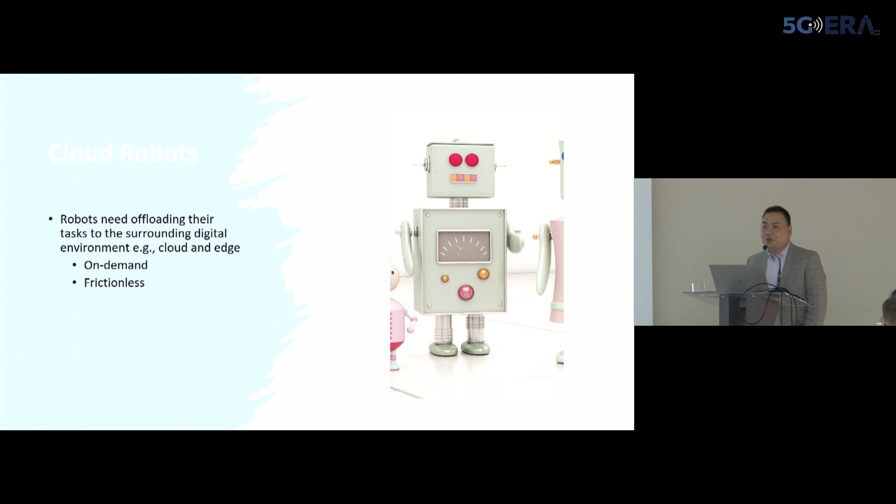So in that sense, we want to offload some of the tasks running in the robot to be running in the cloud, to be running in the edge, and eventually we hope we can deliver better robots to serve people and to serve the community.

But I would say that this is still on paper, because you can see a lot of effort in translating the daily activity into robotic service, into cloud robotics. However, we face quite a few issues in actually accepting the application by the industry, although there is lots of effort like Amazon providing the cloud robot service like RoboMaker.

But the majority of things we face in robot application, especially related to networking, is that the applications are normally designed for structured and industrial environments. In this sense, you have fixed quality of service, the network topology is generally static, and you're working in a single domain, single administration environment. Unfortunately, this is not the case we have with our internet, and we normally face different kinds of challenges in terms of unstructured network, topology, different administration, etc.

As a result, a lot of appealing applications for robotics are not actually translated into services in the community.

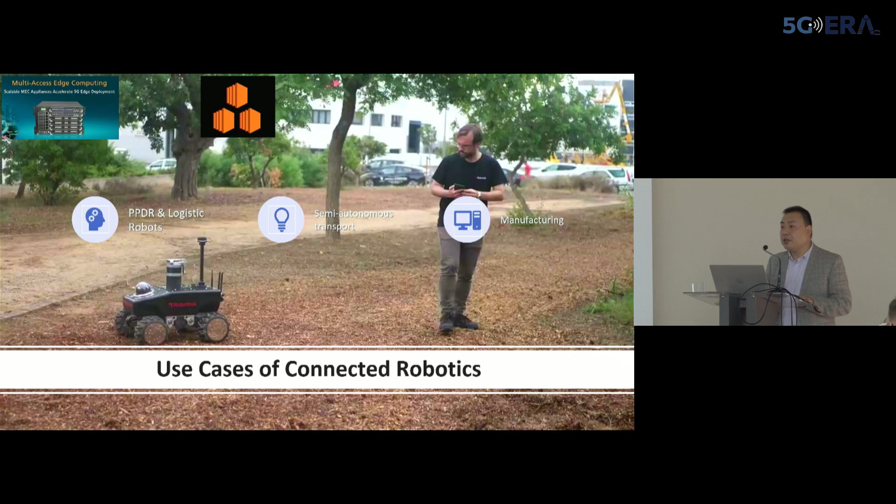We will show you a few use cases first. My colleague will talk about the PPDR and logistic robots, semi-autonomous robots, and manufacturing applications. Using these use cases, we will show the benefit of the connected robots. We take advantage of cloud resources, we take advantage of edge computing, but more importantly, we take advantage of the whole network behind us to deliver better robotic service.

So that's the agenda for today, and you can see that we will start with the use cases, 3 of them used by the project, and after that we'll talk about what is behind those use cases. Lots of people talk about use cases for 5G, for 6G, and in our sense we're trying to fully implement the network softwareization for the robotics. We will explain how we achieve them by the technical issues we're explaining.

And in the afternoon we will have 4 booth sessions in this room showing our use cases and reference design. And finally we will have our seminar and tutorials together with the booth sessions explaining our fleet management ideas, and a tutorial on how to add security and identity management, how to use the relay network.

We mentioned that we want to do the full softwareization for the robot application. So this is behind the implementation. They are available on GitHub. We'll do the tutorial with you.

And then finally, we have our live demo of a simulated PPDR robot in the car park of OTE Academy.

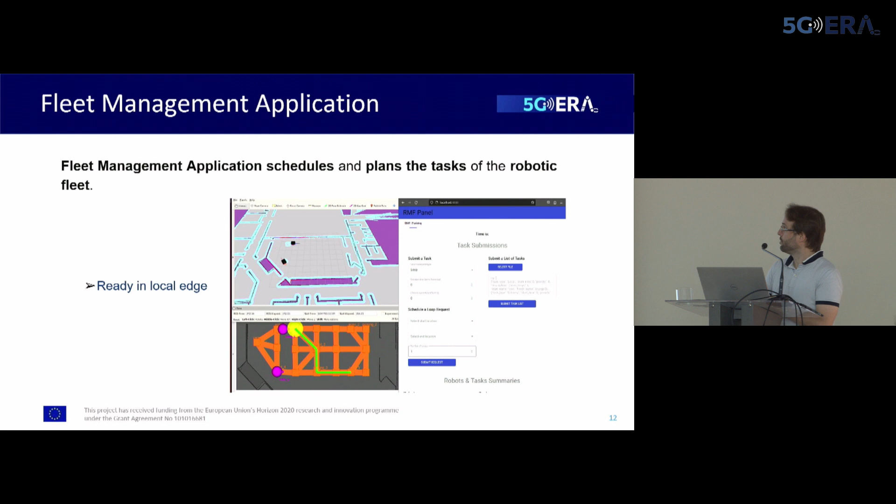So we have frontier exploration. This is like a joint application - when you have an unknown environment, you will need to make a map for the robot to locate itself, and also you have the 3D map.

Also, you will need some kind of 5G signal quality mapping, because if you want to do things like offloading or human recognition, you need to know where it's forbidden to go or if it's a bad choice. We also combine it with remote operation, because with something more industrial-like it's easier to make an algorithm that sweeps the area, but with unstructured environments, we need something that relies on a human in order to have a good map of that.

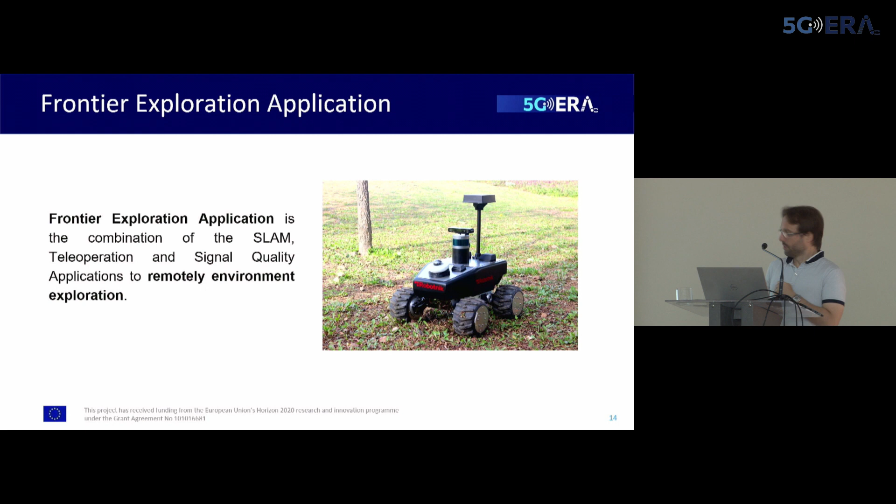So let's move to human presence. This is an application for detecting people. We're thinking that in case of disaster, you use AI recognition, but this kind of robot has heavy load that can stress the computer inside. The idea is to detect a human, like these examples, and save the location of the robot at that time, so afterwards rescuers can be sent there. So when the robot is doing the map or sweeping to search an area, it automatically detects people and sends this location to the rescuers.

The signal quality application is about making a map of the signal quality of the 5G network. I think this is very interesting for the network community, because when you're deploying antennas in this kind of environment, you need to know if you have black spots or areas without good signal. With this, we make a semantic map, a color map that indicates how well the signal arrives to the robot.

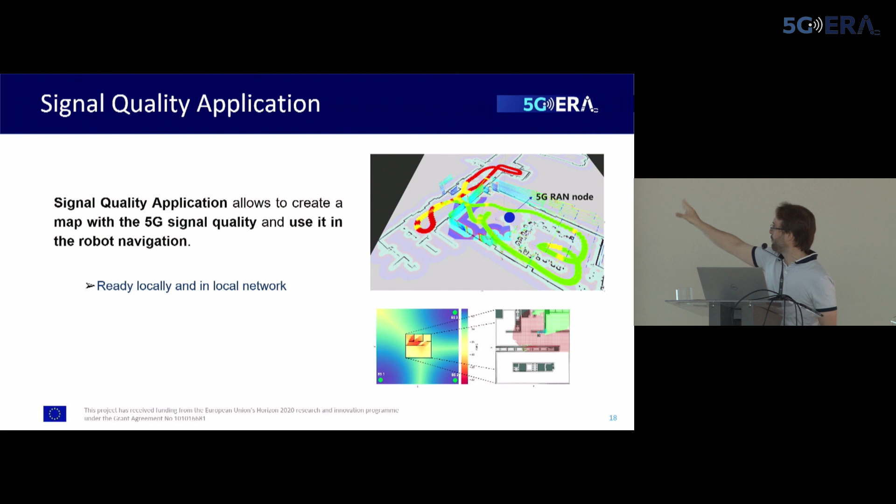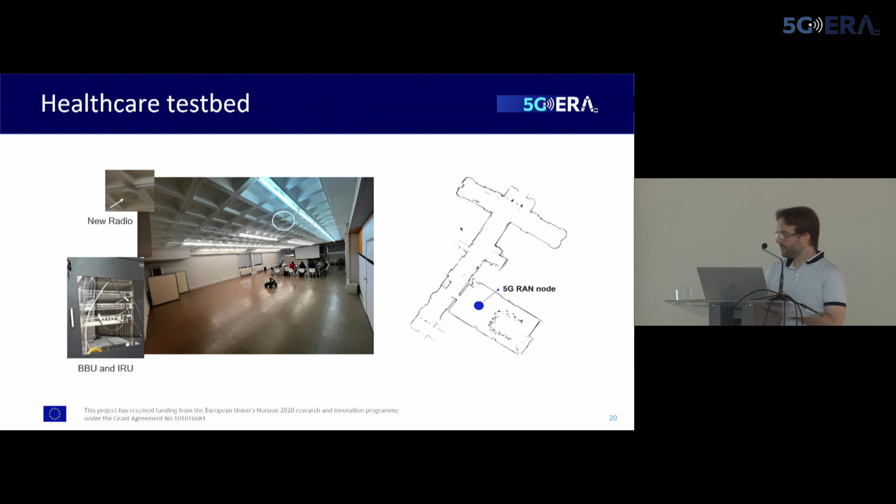So let's see what we have done in the last few months. We were here. Thank you to OTE for having us, and we could make this map with the signal quality, and also test the surveillance outside with the human presence application, and we have the PPDR.

So we have some kind of video that I hope works. Well, my Greek is not... I think this goes here. Okay. So this is a video with the surveillance case.

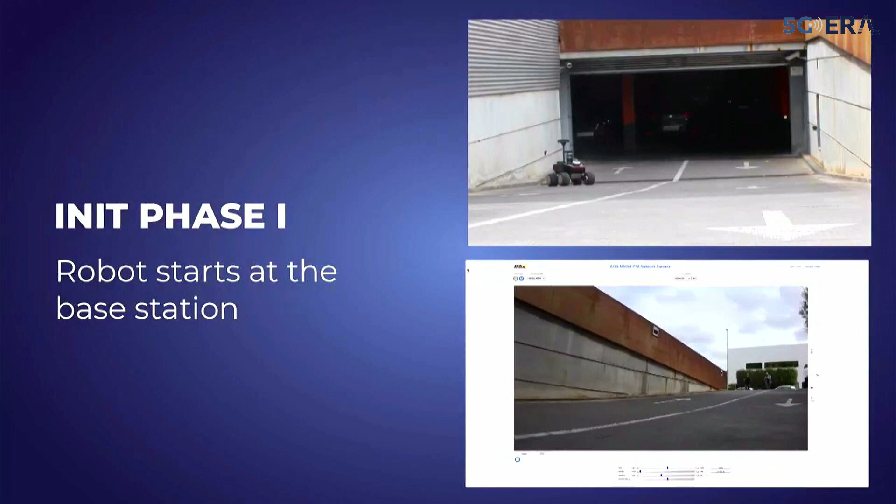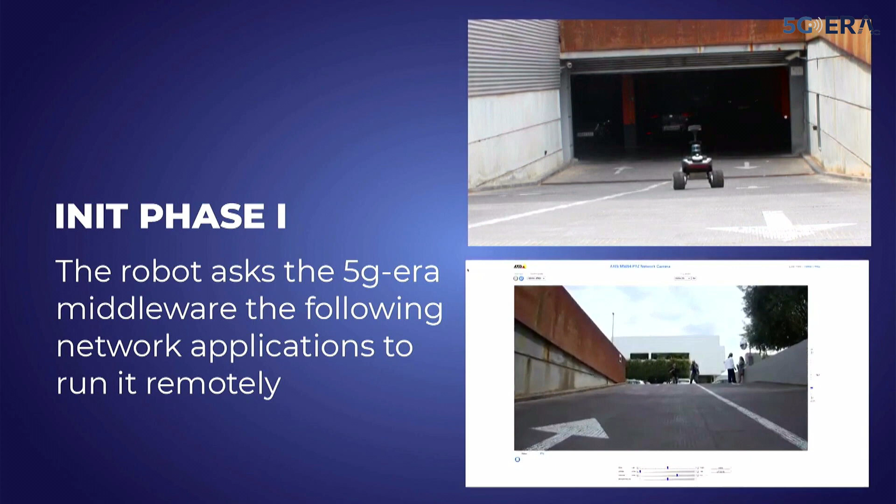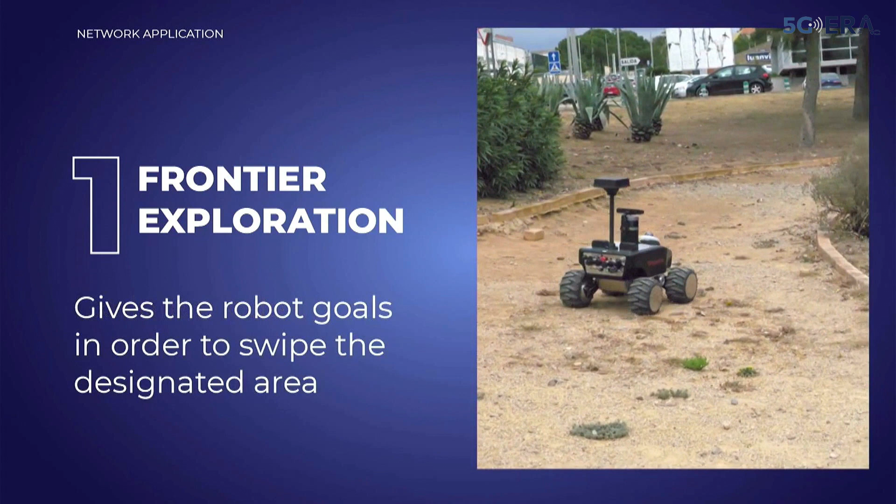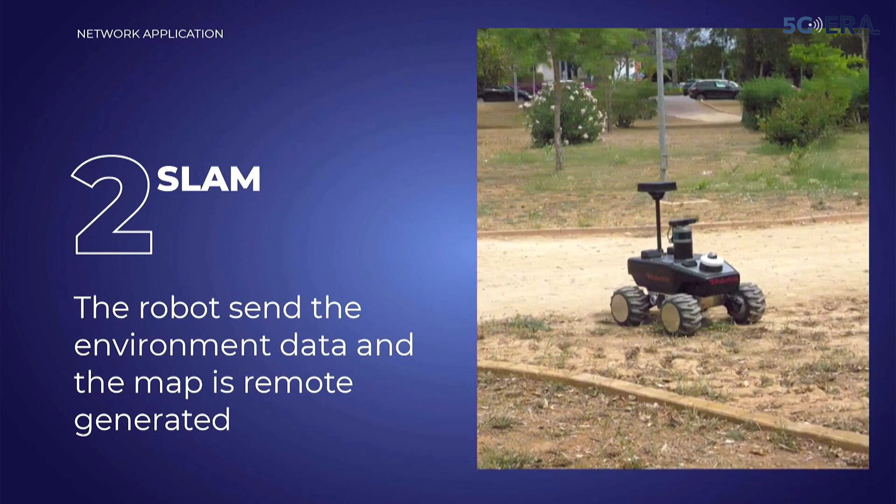So more or less, this is the workflow. First it sweeps the area using exploration mode, the frontier exploration, and you can see this is a robot for outdoors, so we should expect changes. It will sweep this, for example, an unstructured area. Now it's moving, making the map. And the map is not generated inside the robot, it's outside. Also, it's searching for people.

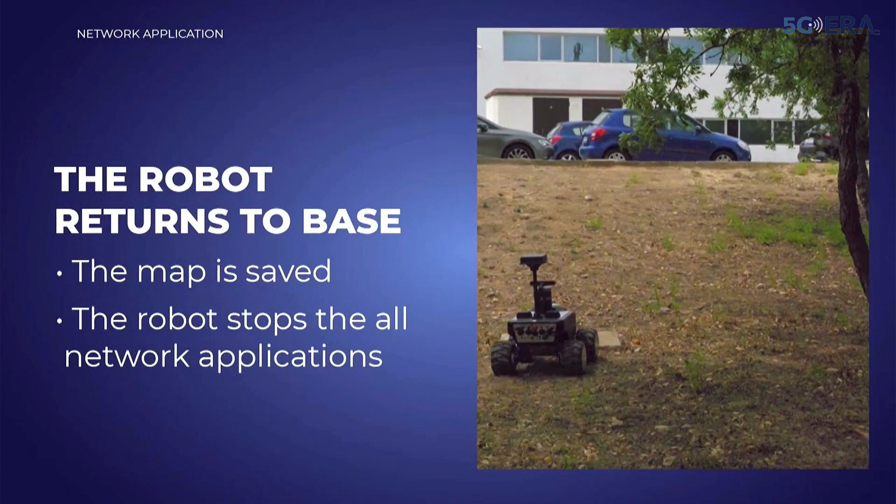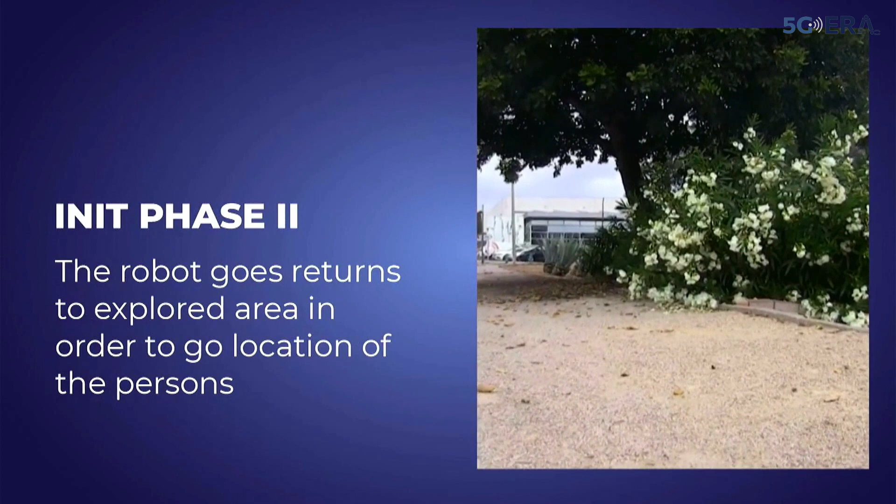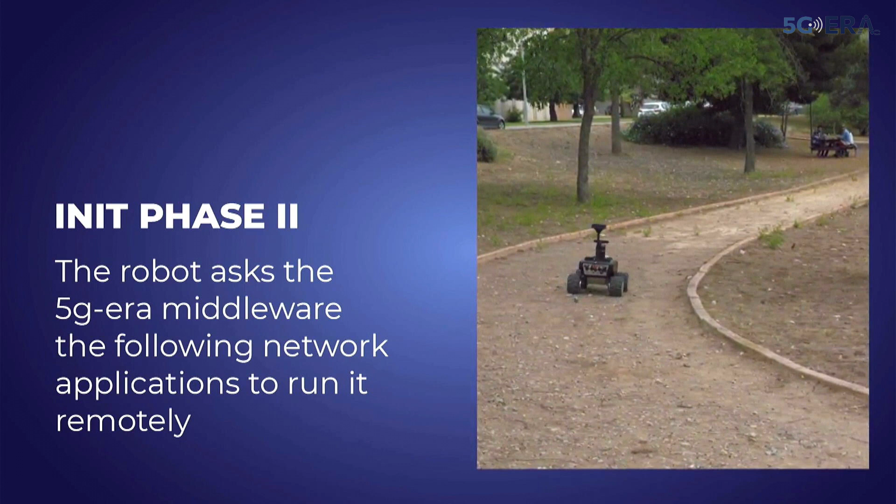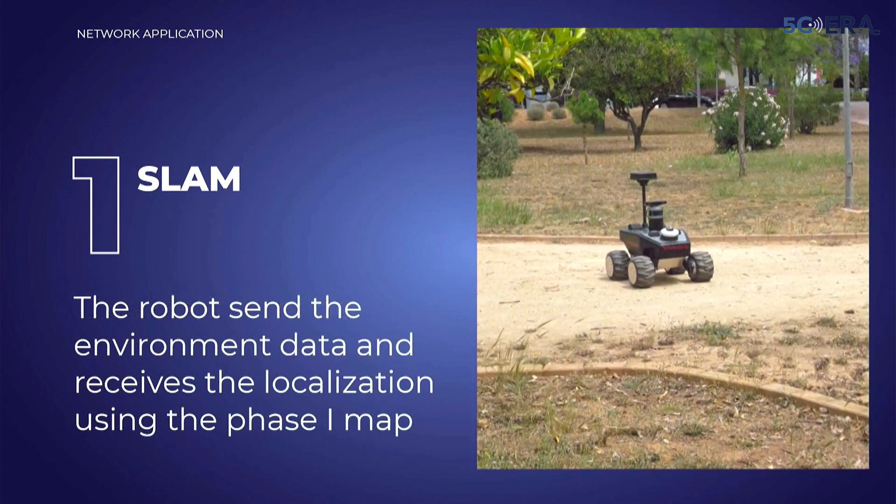Now the robot returns to the base. It has made a map of the area, and now it can move more precisely to certain areas. So now it has the map, and it can start the second phase. Once we have the map, the robot goes to the last known location in order to check, and a remote operator can give control so it can come closer to the robot, to the person, and also localize itself with the map, with the previously generated mapping. This map could also be shared among other robots if we have more.

So this is a great advantage to have it on the edge, on the cloud. Now it's returning to the last known presence, and it provides the ability for the robot to navigate autonomously to the human point. And now it's giving remote control to the operator.

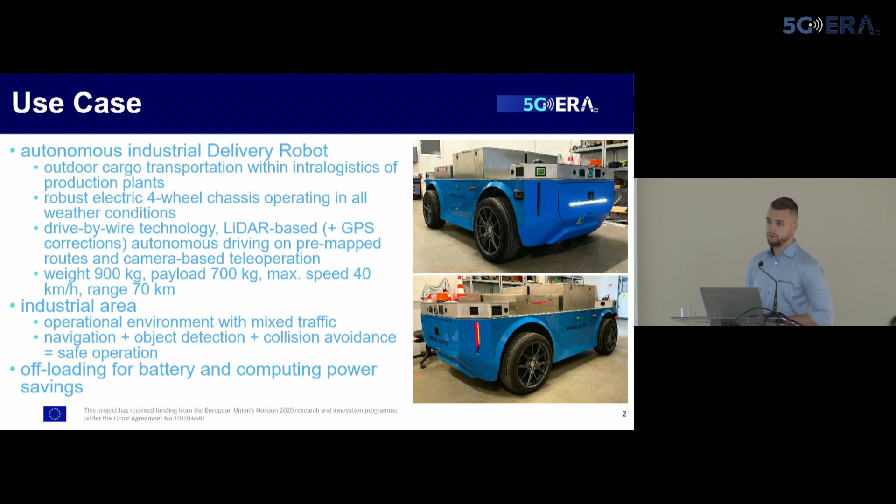This is how the robot looks like, and we can move on to the outcomes we are trying to reach within 5G-ERA. The two main ones are two network applications, which I will talk about in a while. The first one is train sensor, and the second one is collision avoidance.

Regarding other hardware and software which we use within 5G-ERA, there are three automotive-grade cameras used for these tasks and network applications, with 120 degrees field of view. Then there are clients running on Jetsons, which communicate via public 5G networks using the router RUTX50, and communication with the 5G-ERA middleware, which is deployed in the cloud, as well as the network applications, which are deployed in the cloud.

But the network applications are also deployed locally. That's because when there is an area where the network performance is pretty poor, we need to seamlessly transfer from cloud processing to local processing to enhance network performance in that case. But the main outcome is that we are able to offload to the cloud, so the local processing is used just as a backup if the network is poor.

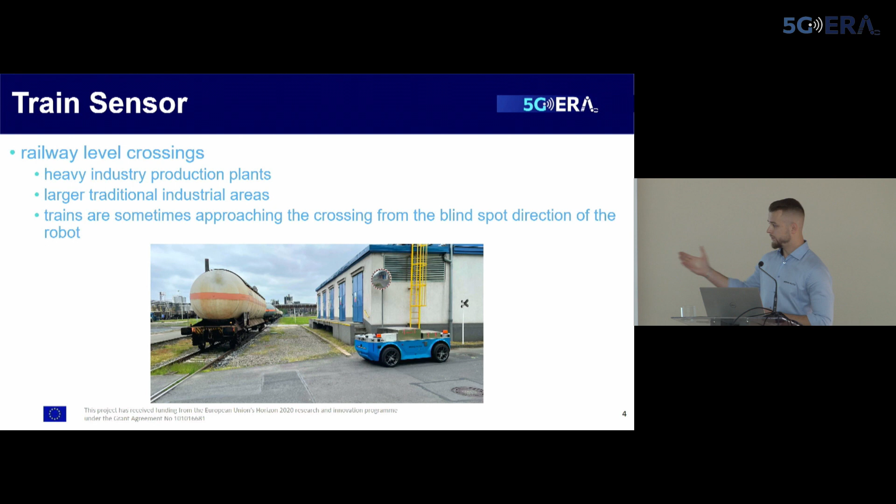In most places, the trains are crossing the road in various directions. And the challenge here is that sometimes they approach the crossing from the blind spot direction of the robot. So that's why we need to detect them, and make sure the robot is safe to cross without colliding with the train. This is just an example of how it can look.

The workflow of this network application is pretty straightforward. We use two cameras, the front right and front left on the other side of the robot, for this network application. The robot comes to the railway crossing, stops in front of it, and triggers the detection of trains, detecting them for as much time as needed to be 100% sure that the crossing is safe to pass.

The results we obtain after processing within the network application are four main ones: no train detected at all, or trains detected but not moving, in which case it's safe; trains detected and moving in either direction; and the fourth case, which is sometimes an issue, where the YOLO5 detector is not able to determine whether it is a train or whether it's moving.

In case the trains are not detected, or they are detected but not moving for, say, 7 seconds, we can set this value. Then it is a signal for the robot, for the autonomy system, that the crossing is safe to cross and pass.

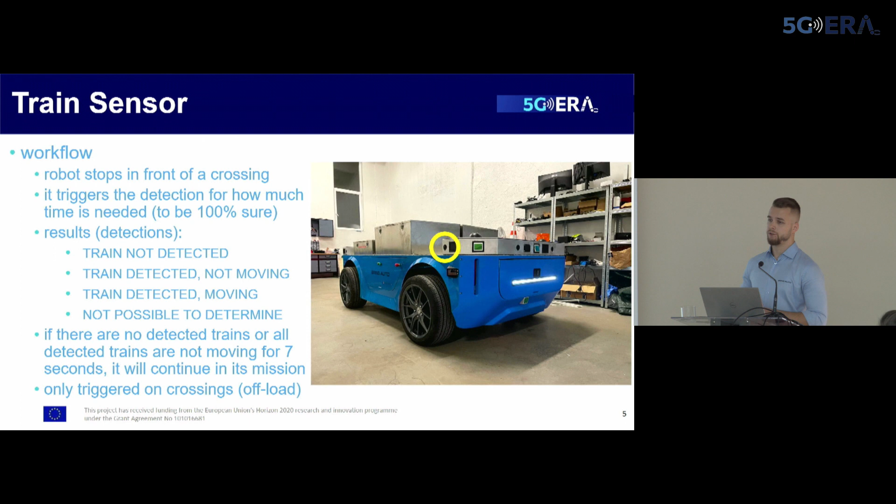This is how the train sensor works. The important thing here is that the train sensor network application is not running all the time. It is rather triggered only at railway crossings, which means we are able to offload even more and save power.

Now this is a video of how it looks. You can see my colleague Aladdin riding the robot. The robot is moving autonomously on a pre-mapped route. Now it comes to the railway crossing, so it stops in front of the crossing and triggers the detection. Down there will be the views of the left camera and right camera.

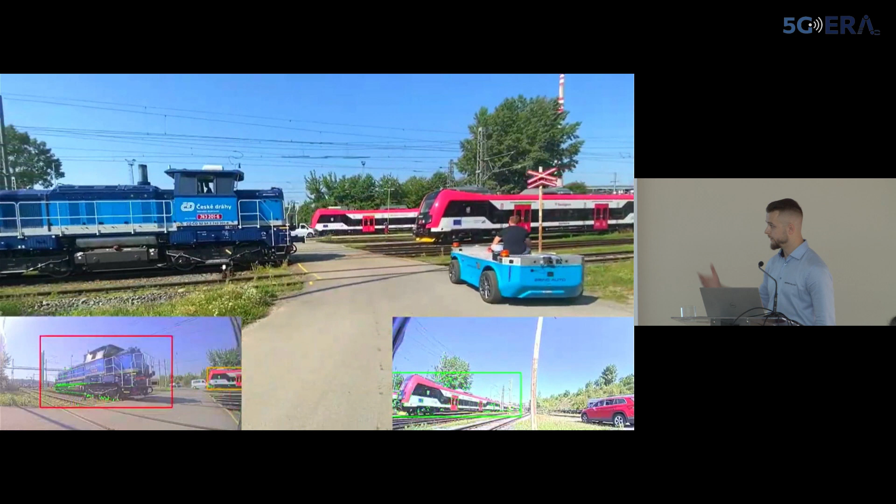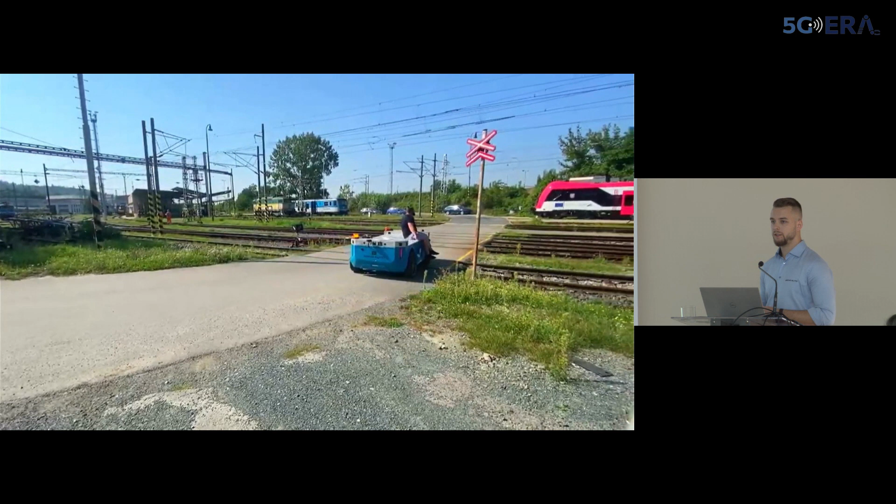Now the train is on the left, behind. It slowly brakes and stops moving. The robot detects all trains as not moving, and this is the signal that the robot is capable of crossing that crossing safely. Now it continues its mission, its task, and safely crosses the crossing.

So this is how the train sensor network application works, and why it is important for us to sense and detect all the trains.

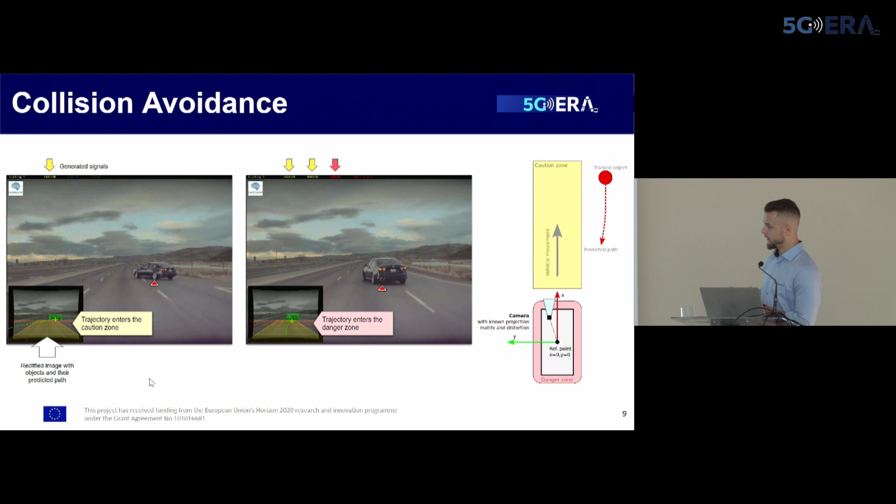So this is just the brief idea behind these network applications. The visualization or UI looks like this: in the top part there are the generated signals — caution, warning, danger. In the bottom left corner is the visualization of the robot space with the caution zone in front of it, and the detected objects marked with a red arrow and a green square. So this is how it looks in principle.

Why is this so important for us? Of course, whatever the robot, whatever the area or environment, and whatever the use case, when driving autonomously at certain speeds, collision detection, obstacle detection, and collision avoidance are two systems essential for safe autonomous operation. Each autonomous robot should have these two systems to navigate the area and avoid collisions. So this is why we need to detect objects and avoid collisions, and the workflow is a little different in this case.

The collision avoidance network application runs the whole time, so it's real-time object detection and tracking, unlike the train sensor which is triggered. The collision avoidance runs the whole time during robot operation. As long as no object is detected, or detected objects are not about to enter the caution zone, the robot drives at full speed, let's say 20 kilometers per hour.

If an object is about to enter the caution zone, a caution signal is generated, meaning the robot will slow down to half of its full speed, so 10 kilometers per hour in this case. If a warning signal is generated, it means the object is already in the caution zone, and the robot starts to brake and stop.

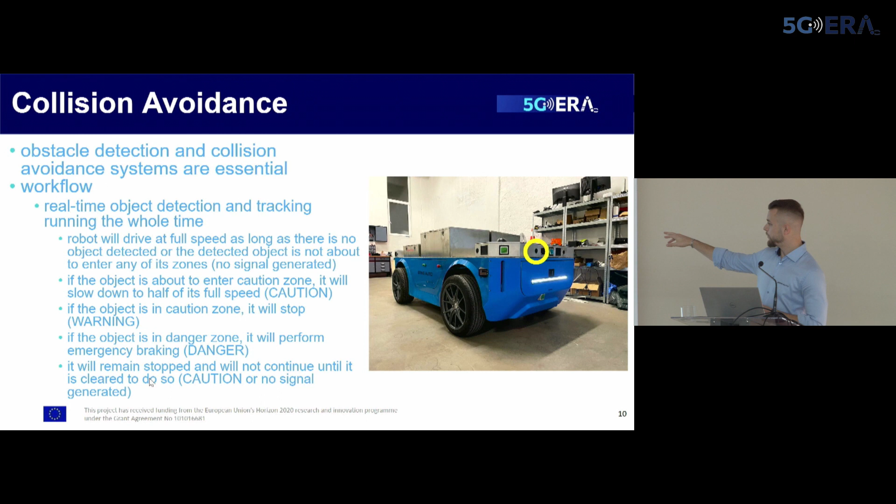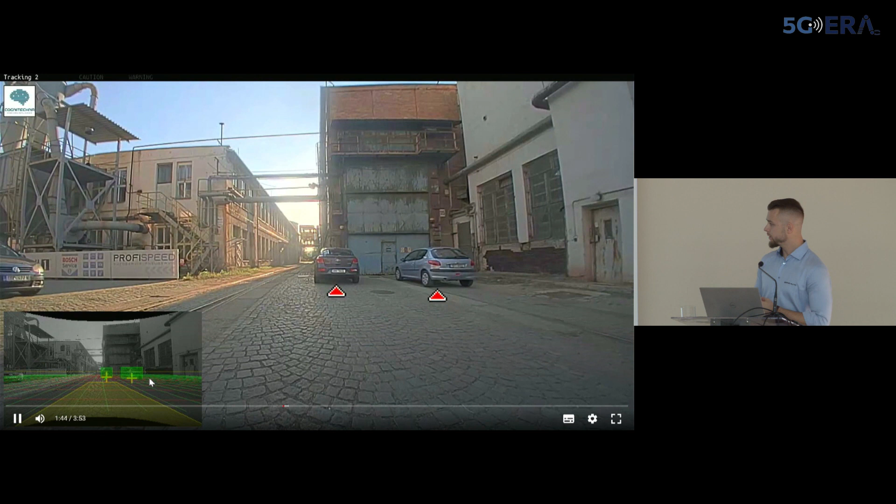For this purpose, we use the front camera of the robot. This is a video of how the collision avoidance network application works. You can see cars detected from the image, and now it slows down because the car was in the caution zone. It turns down there. You can see the detected objects and the caution zone of the robot.

It detects the cars, but there is also one of my colleagues. The robot detects him. First it slows down to half its speed because the caution signal was generated. Then, as my colleague stood right in front of the robot, the warning signal was generated, and the robot stopped in that case. So this is just a brief showcase of how it works.

In the afternoon session, at the booth, we'll have a live demo of how the collision avoidance works. It will be done remotely, so the robot is currently in Brno, in the Czech Republic, but I will be able to show live how the collision avoidance works. That's all from my side, from our use case. I'm happy to answer questions afterwards or at the booth session. Thank you very much.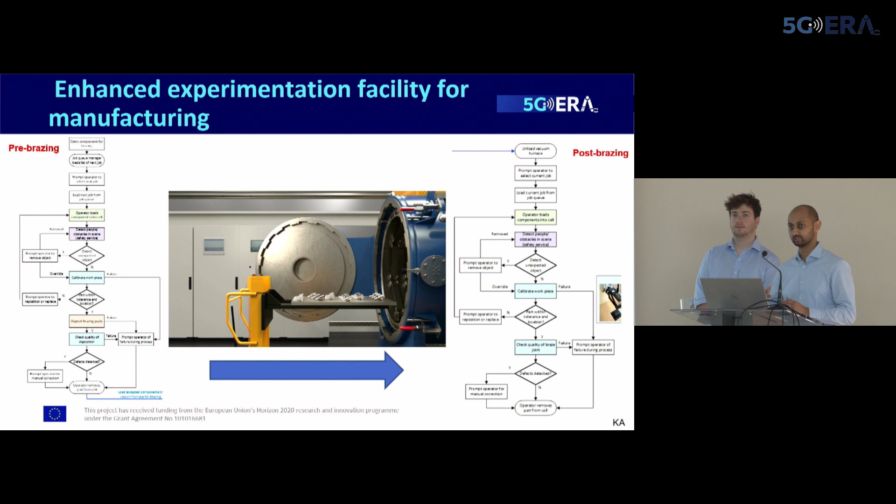So what we have is 3 steps in this kind of manufacturing process. We've got the pre-process steps, which essentially requires loading of parts into our robotic cell, where the operator engages with the robot through either mixed reality or virtual reality to execute robotic movements. The robot then assists the operator by conducting defect detection through a laser scanner, but also being able to dispense paste, which is essential for the process.

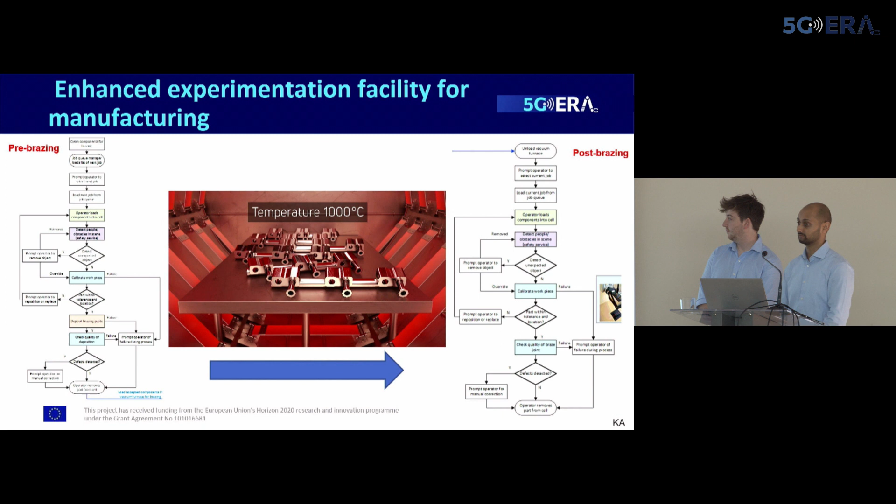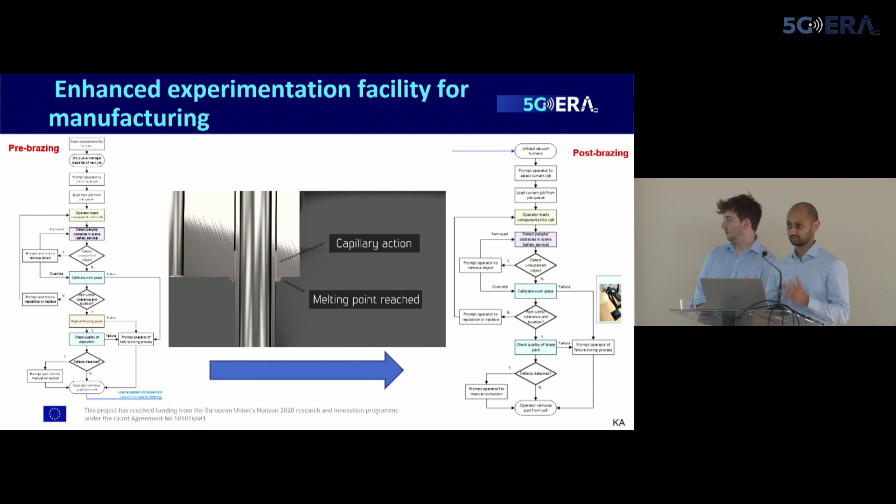So once that's all done, it's loaded into the furnace like you're seeing in the middle. Inside the furnace, the temperature is increased up to as high as 1,000 degrees, where the paste is melted, and then the temperature reduces where it solidifies and creates a component. Once this whole process is complete, the parts are removed from the furnace and then goes back into the post-processing step, which is on the right-hand side.

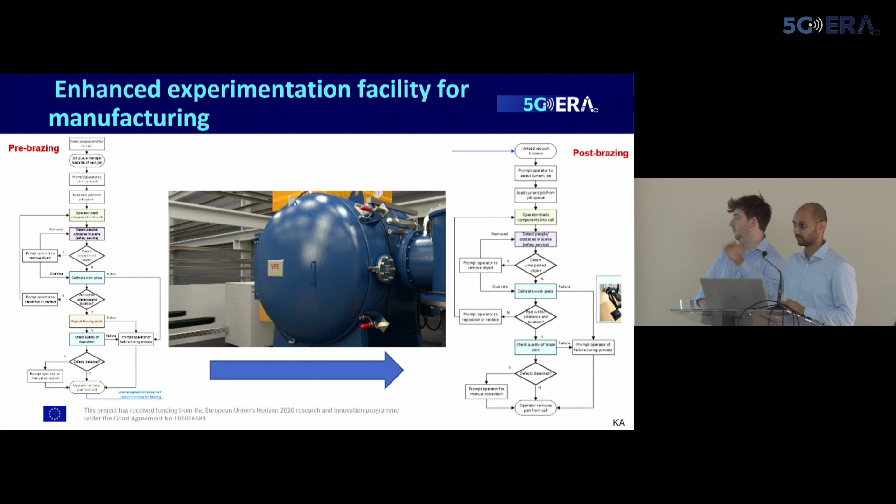And here what happens is the robot then assesses the part that's been manufactured and assesses it for defects and reports back to the operator. And then the cycle continues with the next part.

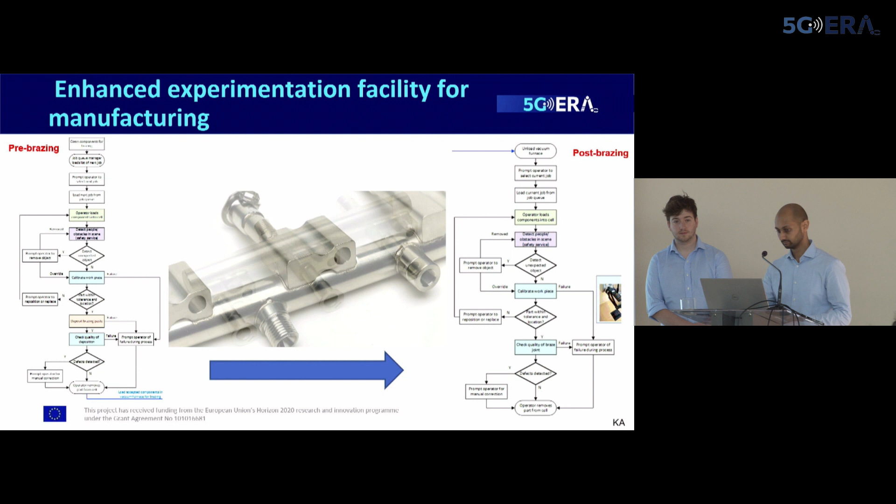Yeah, so as Kandap's just been describing, this is obviously a very high expertise procedure to run. It's a process that requires a huge amount of training to be able to do properly as a human operator. So for us, it was critical to, at a very early stage of the project, break down all the stages that the cell was going to have to be able to deliver.

So a big exercise for us at the beginning was building this flow chart, this roadmap of what, at every stage, the robot was going to have to take action on a part, every stage in which the operator was going to have to interact, whether that was through VR or a mixed reality headset. And that allowed us to break down the entire process into a set of microservices, which each is responsible for one part of this process.

For example, we have a microservice that's entirely dedicated to handling jobs as they come in. So everything about the robot's operation, the part that it's operating on, is all handled by a single operation. Everything that interacts with obstacle detection and human presence detection, the robot's capable of autonomously calibrating itself, and then running each individual part of the actual brazing operation is each handled independently.

What that allows us to do, especially with the power of the 5G Era middleware, is to deploy some of these applications where they need to be at the edge, adjacent to the robot itself, or to the laser scan profiler, or the mixed reality headset. Those translation layers, those applications, all need to be at the edge in order to interact directly with the hardware.

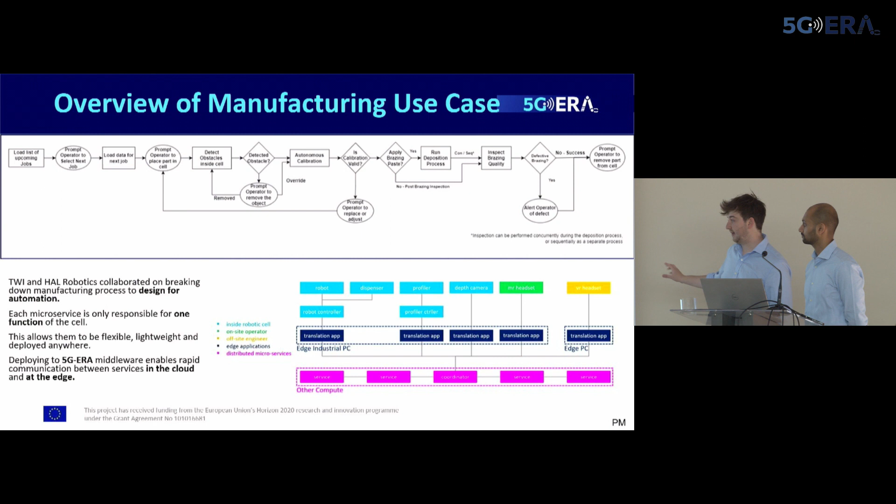But also, similar to what Guillaume had said before about their deployment, we can offload a lot of our more intense elements, such as toolpath generation and the robot digital twin, to the cloud or to on-premises servers that are not in the cell.

So I guess just to summarize what we're doing in this case is we're looking at a semi-autonomous manufacturing process, and as Paul discussed some of the difficulties, in our particular manufacturing environment, we've got a lot of security protocols in place, and also the necessity for high quality assurance of parts. This creates a lot of problems and difficulties with the deployment of network-based services.

However, through 5G Era and this project, and with the support of Paul and HAL Robotics, what we have been able to do is, with the combination of the network-based microservices and the orchestration of the hardware we have deployed at our facility on site, we've been able to execute a potentially autonomous manufacturing process.

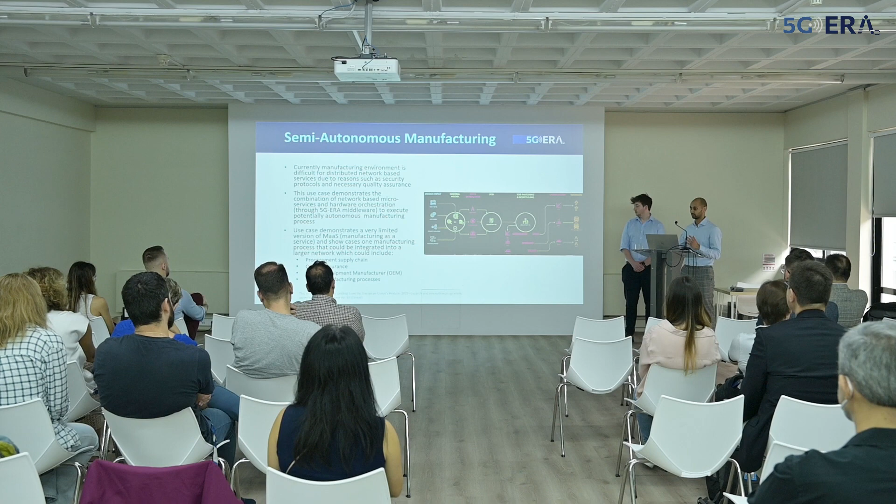And I guess one of the things about this particular use case is that it's a very small scale demonstration of MaaS, which is manufacturing as a service. And the idea we're trying to show is that this is a very small scale cell which could be replicated and also integrated into a much larger manufacturing as a service network, which could include spokes such as the procurement supply chain, proper quality control, the original equipment manufacturers such as Rolls-Royce, Airbus, and also other processes required in the manufacturing stage, which could be upstream or downstream of our particular cell.

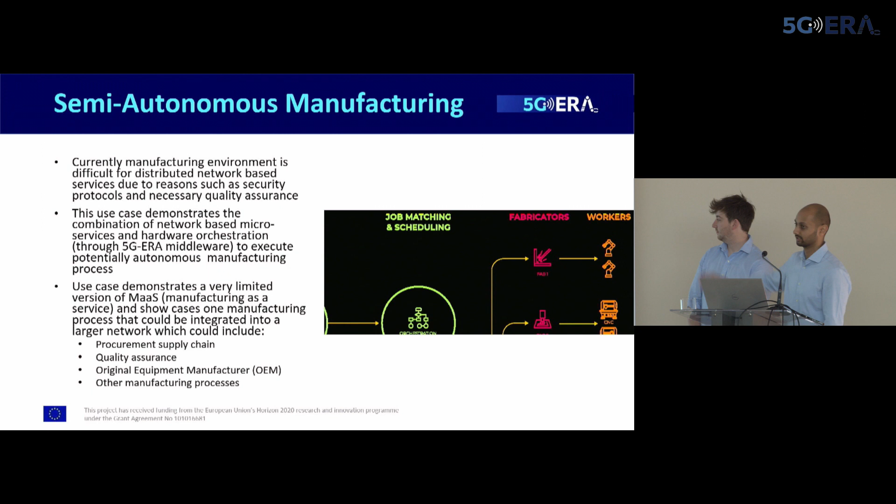So this diagram is showing you what a manufacturing network could look like on a MaaS system. And I guess what I've tried to do is just show you that we are just one potential fabricator or worker within this, to demonstrate how that could be used and deployed.

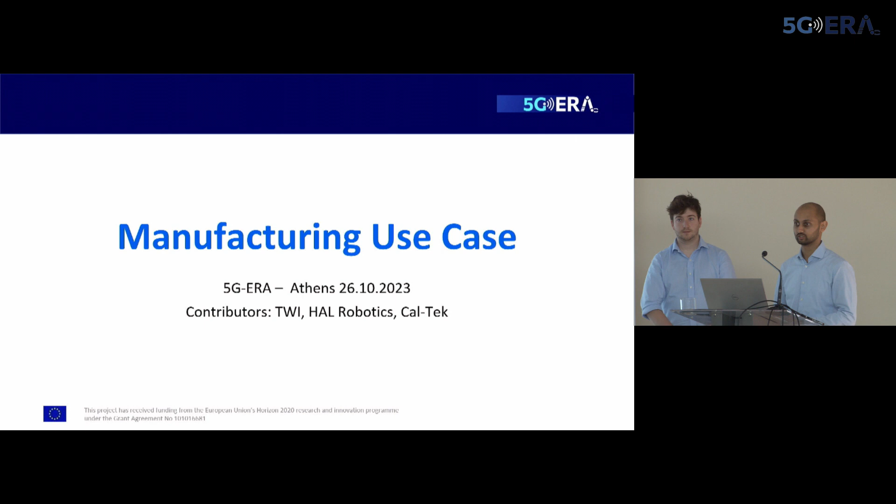So now I'll give you a quick update on what we've been doing in terms of our demonstration within our facility in Cambridge.

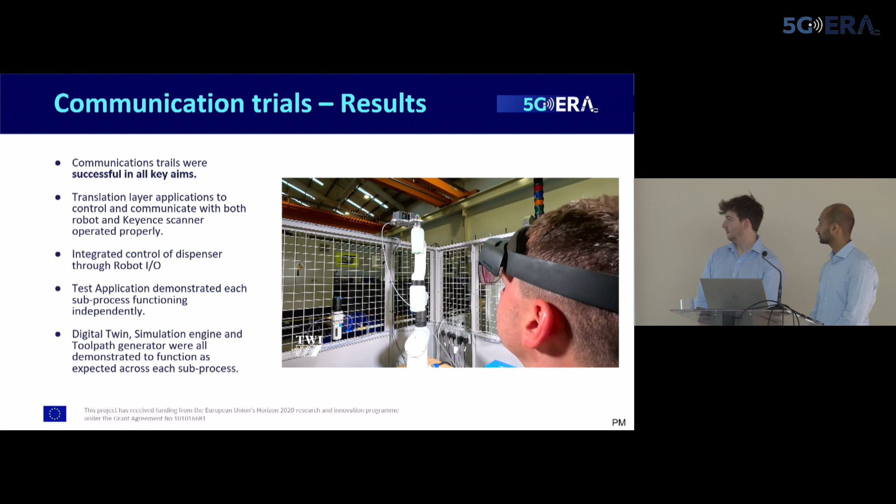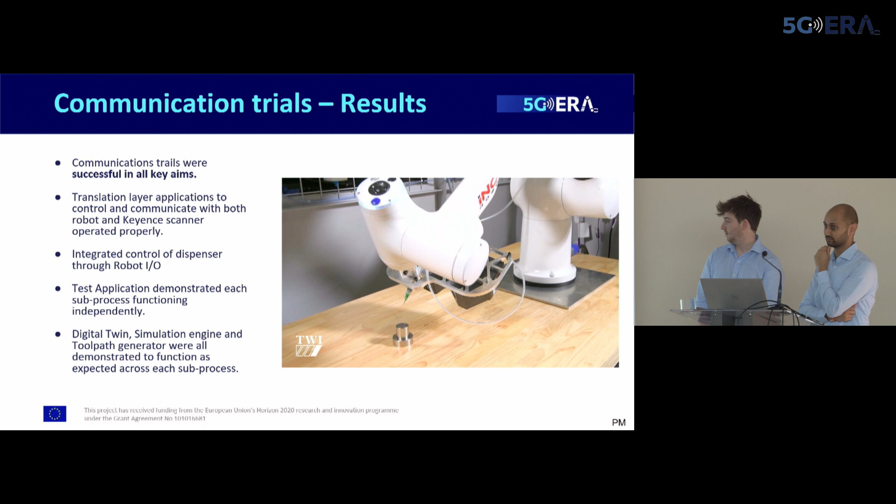So what we're trying to do here is some communication trials where we're running local tests, essentially making sure all the microservices we've developed are engaging. So what we have here is the robot toolpath and the dispensing of the paste. Currently we're working on the laser scanner, so we should have that online very soon, and we'll be running trials with our virtual and mixed reality headsets as well.

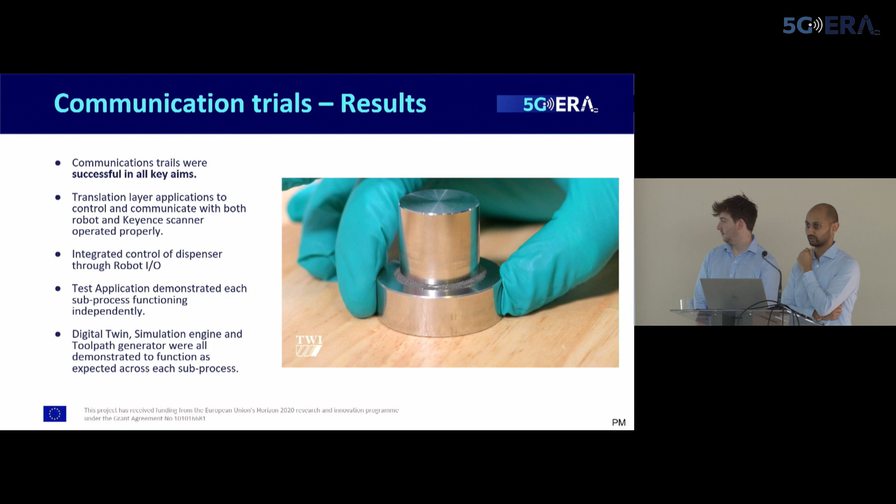From an operator perspective, Alex's entire engagement is just, in his mixed reality view, as this video will show, he's seeing a list of all the jobs coming in, and he just selects a job based on the part ID or job ID. He's not programming anything about the robot or designing the toolpath while standing there, he's just selecting a job, hitting go, and the robot extracts all the information it has about the part.

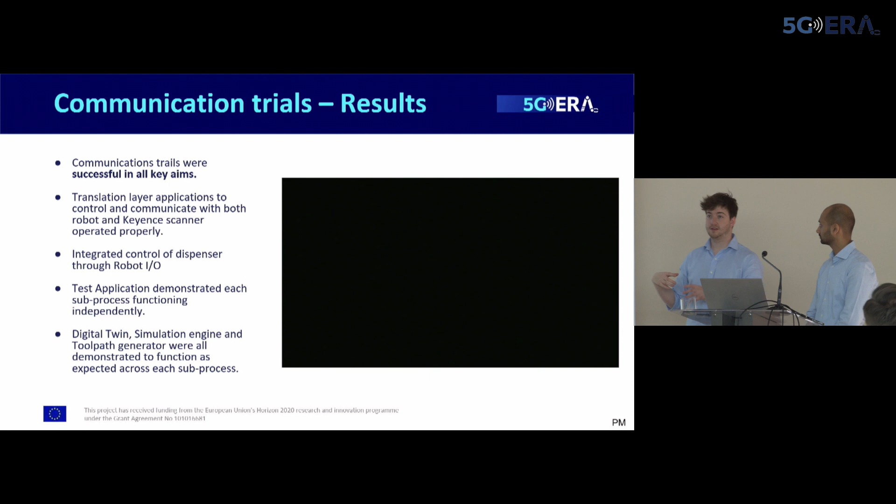So when we see the robot come in and start applying the brazing paste, all the settings about the pressure of the paste, the geometry of the part, and the speeds it has to move at, are all generated based on information contained within that job. So it separates the concerns of an expert-level design phase as a task from the operator just running it. You could have multiple operators in distributed cells and one expert building these jobs for them.

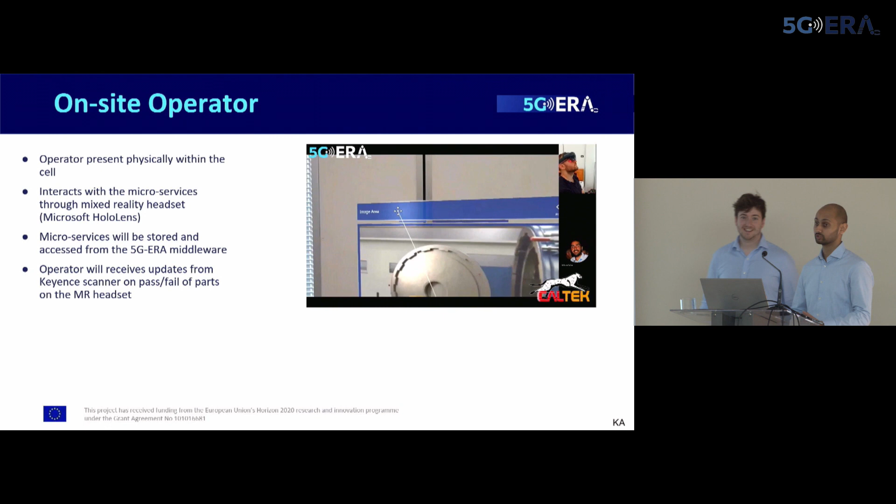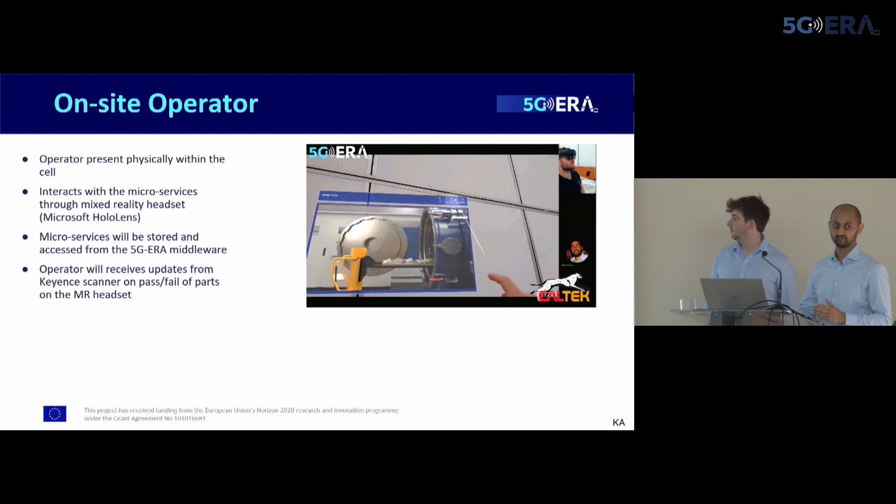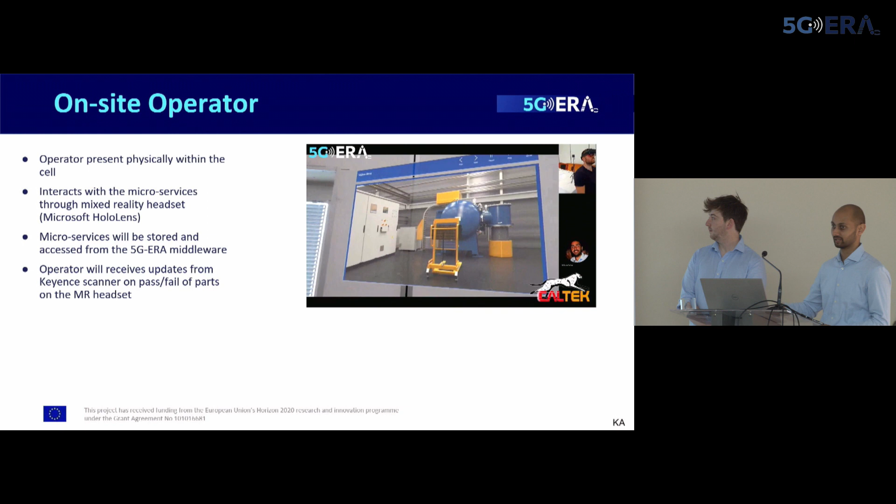As Paul described, we have two types of operators we're trying to demonstrate. First is an on-site operator, someone physically present within the cell with a mixed reality headset, able to interact with the robot cell through the microservices deployed on our 5G-ERA middleware. This allows the operator to engage with the robot through the logic flow diagram I showed earlier, confirming and accepting the trajectory, the dispensing, and receiving data from the laser scanner on whether the part has passed or failed.

And this video is showing the type of visual that the operator will see whilst in this environment.

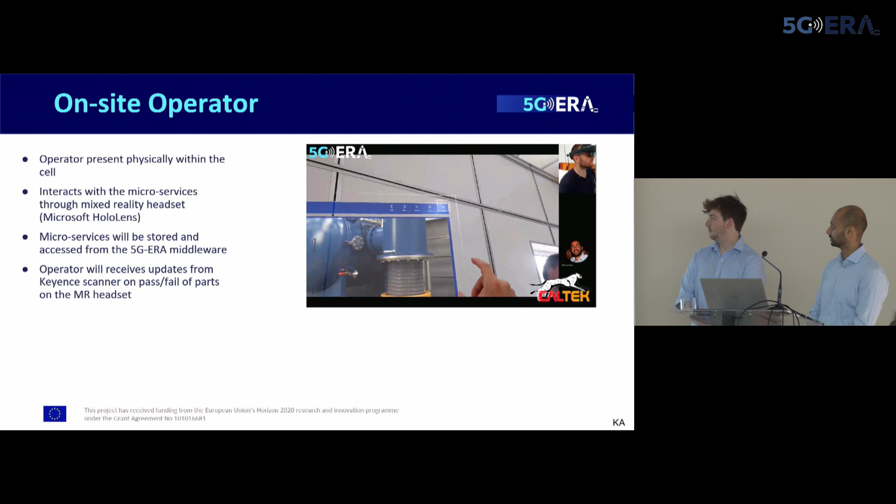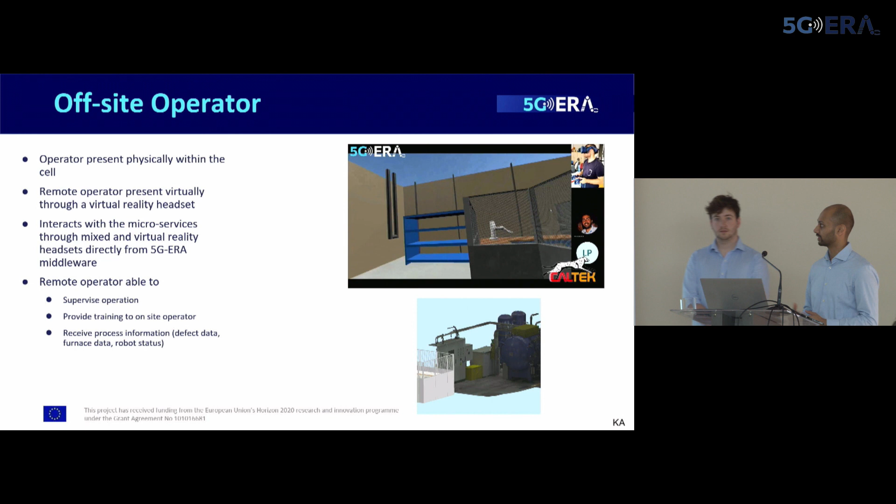The second environment is an off-site operator, a remote operator present virtually through the virtual reality headset, who could be located anywhere in the world in theory. However, as our use case is a semi-autonomous process, we still require a physical operator on site at the moment, just to do the loading and unloading of parts from the cell.

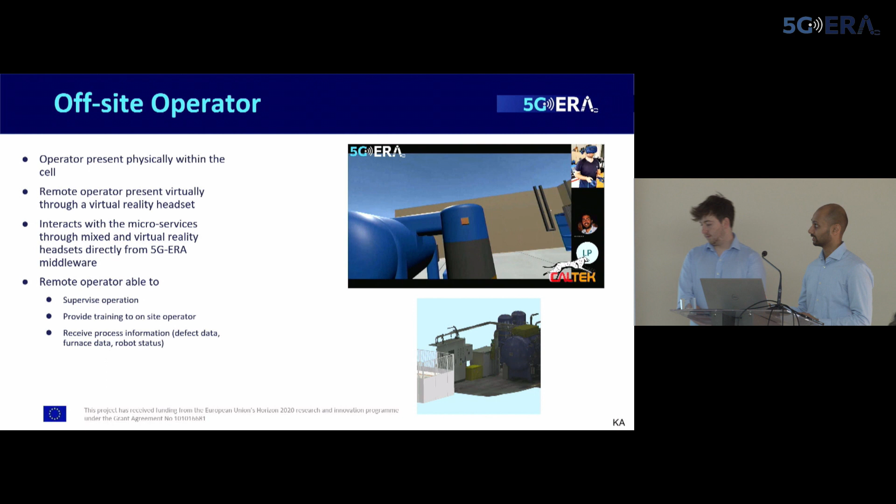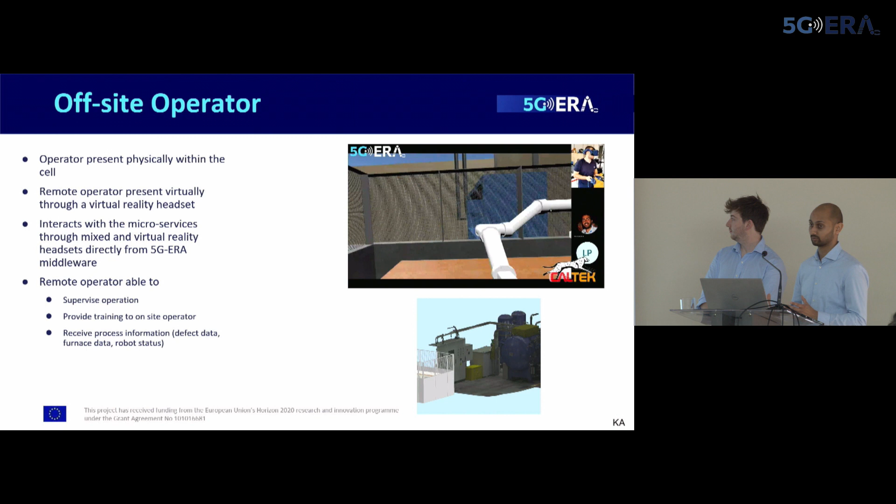But the off-site operator has the same ability as the on-site operator, interacting with the microservices through the virtual environment and directly engaging with the robot, also receiving data from the setup - furnace information, robot information, and defect detection. The role of the off-site operator is to provide supervision of the process with an overarching view of what's happening in the cell, and also to provide training and support to the on-site operator, who could be located anywhere in the world.

Currently we're working on updating the visual in the virtual reality environment. At the bottom is a very low resolution render of our manufacturing process, and we're updating that so the virtual environment looks as representative as the environment we have in Cambridge. We're hoping to have that uploaded in the next couple of weeks, so it should look very nice.